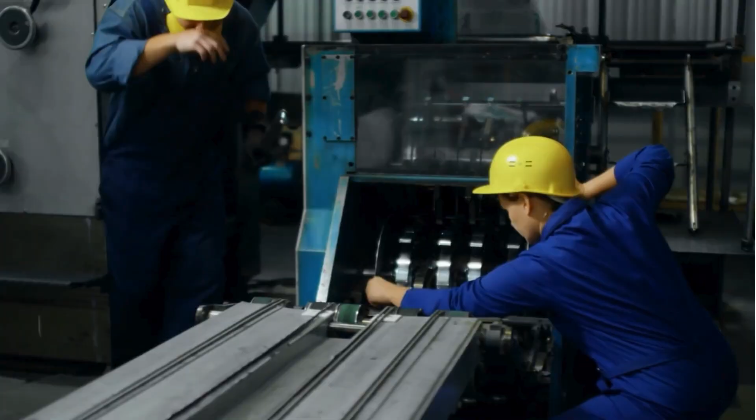Equifactor is the equipment troubleshooting methodology within Taproot to help us understand why a piece of equipment failed. A lot of times an incident, an accident, or some event adverse to quality has some equipment failure involved in the mix, and Equifactor is our tool to help us really understand what happened with that equipment failure. It's not anything crazy engineering technical, you don't have to know any formulas. This is your framework to ask, just like in the rest of Taproot, the same questions an expert in that technical area would ask, so you can get the same answers even if you're not an expert.

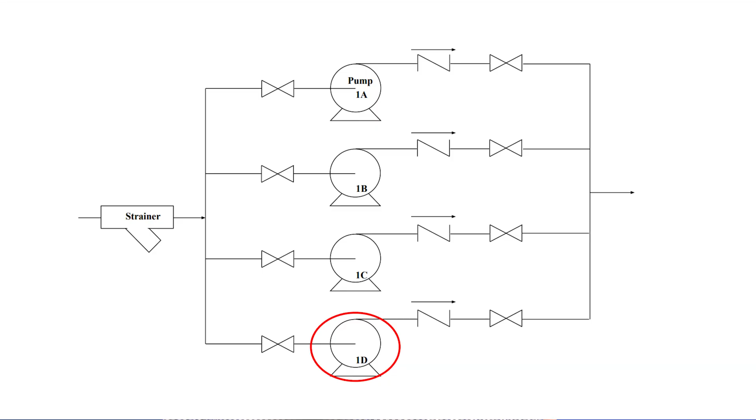We'll walk through a couple examples and see how easy it is to use. So our first one is a pump failure. We have 4 pumps running in parallel. They all went through an overhaul and were put back in the system. They all passed their operational tests except for one pump. This pump is giving us a lot less flow than it should, and we need to figure out what's going on here. So this pump 1D is giving us problems. The rest of them are running awesome.

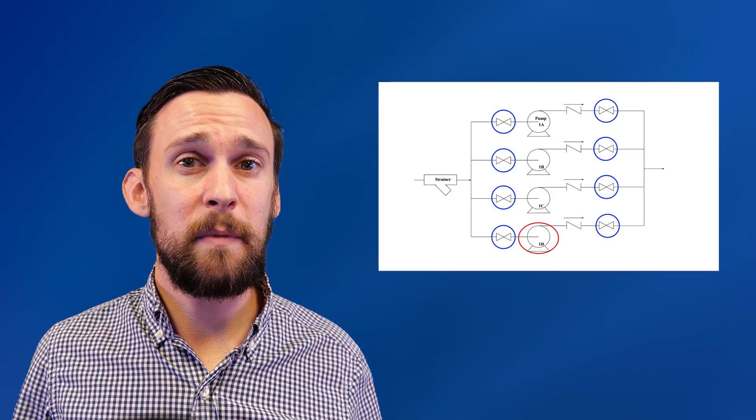All of these pumps are pulling water from the same place and pushing it to the same place. They each have their inlet and outlet isolations in case we do need to work on them, and that check valve there is just to make sure water goes one way. This may not seem like a very complicated diagram, but it's enough to help us ask all those same questions that the experts would.

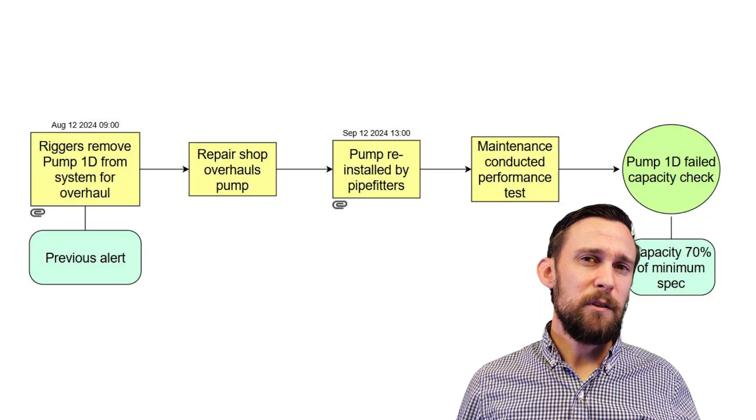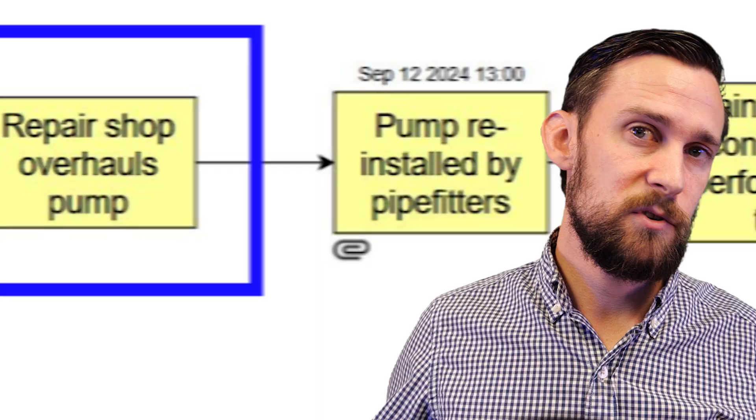We're trying to understand what happened here, and in Taproot that always happens in our SnapCharT, and so that's where Equifactor lives. Now at the start we need to have just a quick timeline of events, and for each of these pumps they were taken out of the system to do their periodic overhaul that they're required to do. The repair shop overhauled the pumps, the pipe fitters reinstalled the pumps, and when maintenance conducted the performance test, 1A, 1B, 1C all worked great, but 1D had only 70% of the required flow. So we need to figure out just what's going on here.

What do we need to look for before we go take this pump back out of the system? There's a few places we can go to learn these questions. This is going to be in your SnapCharT in the Equifactor piece on the Techniques tab. You can pull up your cell phone and go to the Taproot mobile app, or if you have the Equifactor book, all of these tables are in that book as well.

Since I am not a pump expert, I'm going to sit down with one of my expert operators from my company. They may not be a pump expert, but they're very familiar with this equipment. So we're just going to step through the questions to narrow down what we're looking for. First, we know this is a pump issue. I asked my operator, hey, what type of pump is this? What are we working with? Oh, it's a centrifugal pump. And that's the table we're going to walk into.

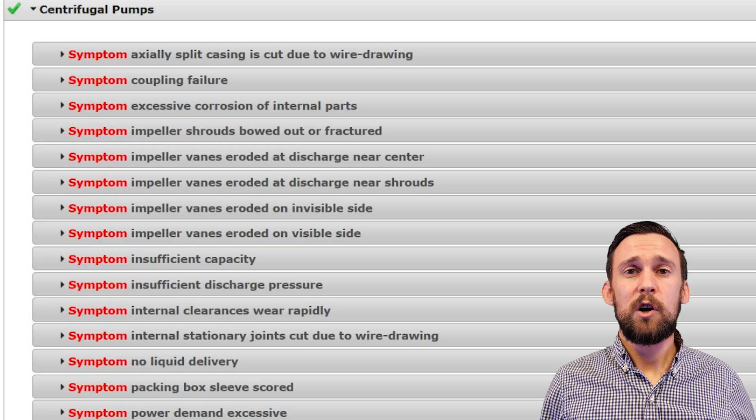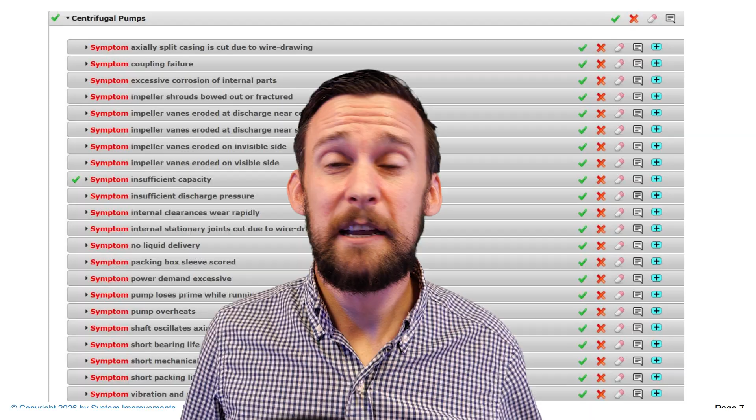Now when I open up this list, there are quite a few symptoms. There's a lot of things that can go wrong with a centrifugal pump, and the one we're looking at here is insufficient capacity, the pump isn't pumping enough water. Now if I see multiple symptoms, like the pump is also overheating or I'm burning out bearings really quickly, then I will also look at those for the same failure. Here we just have a simple loss of flow, and that's all we're looking at. So with my operator, the next step is to open up that symptom and look through all of the possible causes to figure out what do I need to look for here for this pump failure.

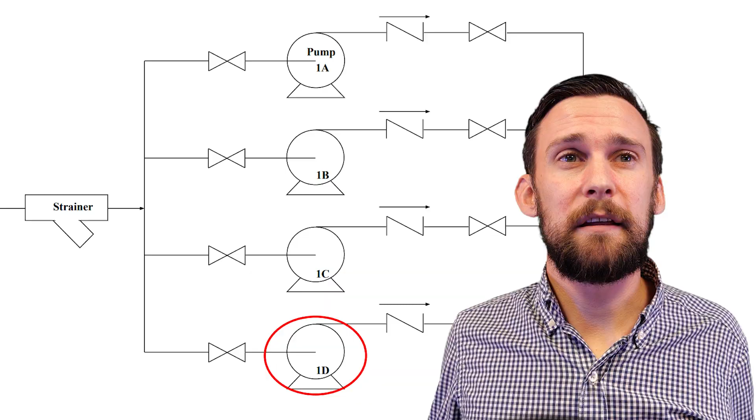You step through one by one asking, is this a possible cause? Our first one is the clogged suction filter or strainer. Is it possible that in this situation we have a clogged suction strainer leading to loss of 30% flow on this one pump? If that strainer is clogged, all of the pumps would be having issues, so we know that is not a possible cause. We mark it off and move on. We never need to look for this because it doesn't apply to our situation. Now we go to the next one.

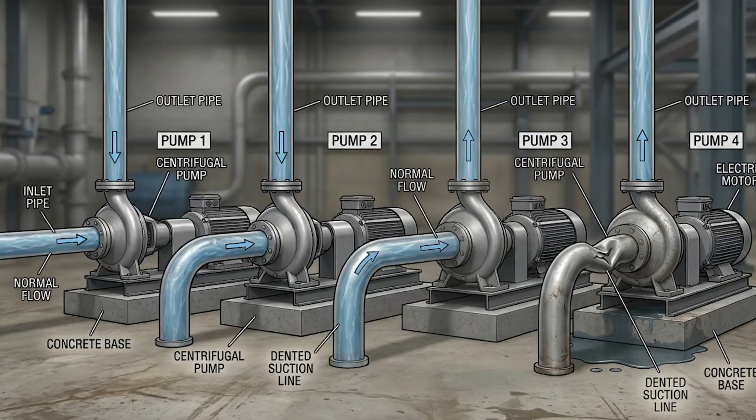Is it possible we have a damaged suction line? Well, we would either see a huge puddle on the floor that's growing at that rate, or we have a huge dent in the suction line. My operator is going to tell me really quickly we don't have this huge kink in this big suction line, so we can cross that off as well.

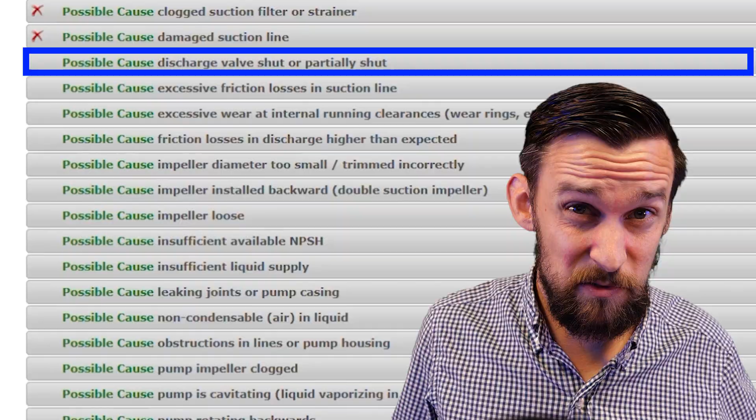Now in the same diagram, is it possible that there is a discharge valve that's partially shut? Maybe it just wasn't opened all the way and we need to go check that. So we're going to add that to our troubleshooting plan. Now most operators are going to have already checked this, but just in case we're in a really stressful situation, we want to make sure that we check it for sure. It'd be really embarrassing if we took this pump out and we weren't able to gather that data, if we just missed something simple like that. So we want to make sure to check it.

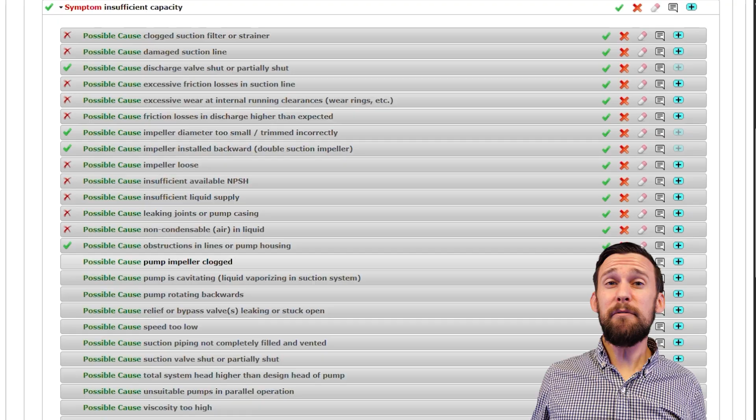Now you're going to do the same thing with all of those possible causes, and in a few minutes you're going to narrow down everything for every insufficient capacity down to what applies here, what we need to check here. And you can see all those shapes got added to our SnapCharT, and this is our troubleshooting list.

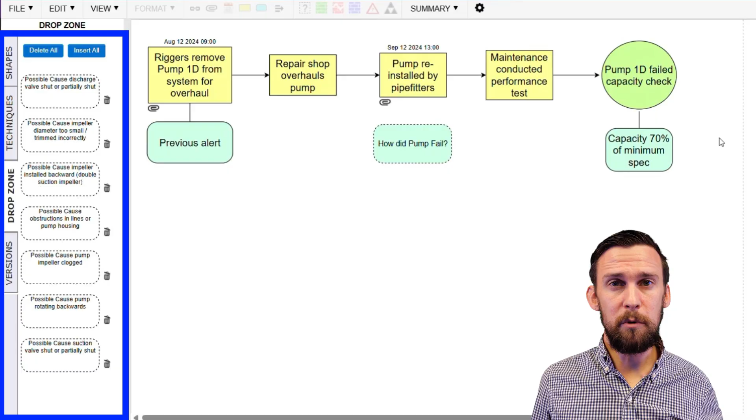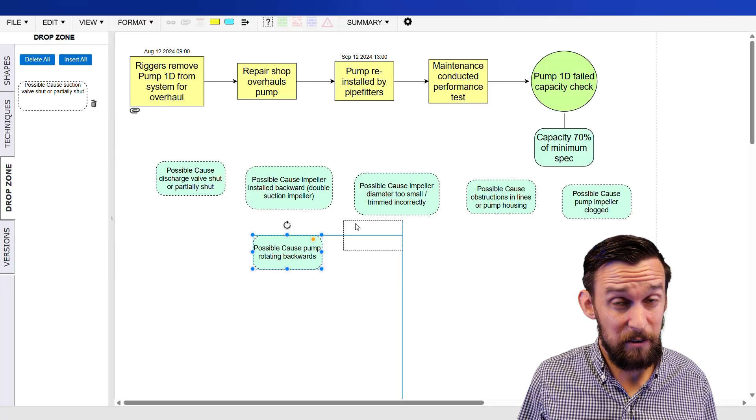Easy as that. So now we need to build out our basic plan on which ones we need to gather first. And we see all these ones on the left. There's some that we have to check first before we go on to the next step, otherwise that data is going to be lost. So we want to make sure that we put the valve line up first. We want to check the rotation direction. And then I need to give my operators a specific step-by-step work instruction.

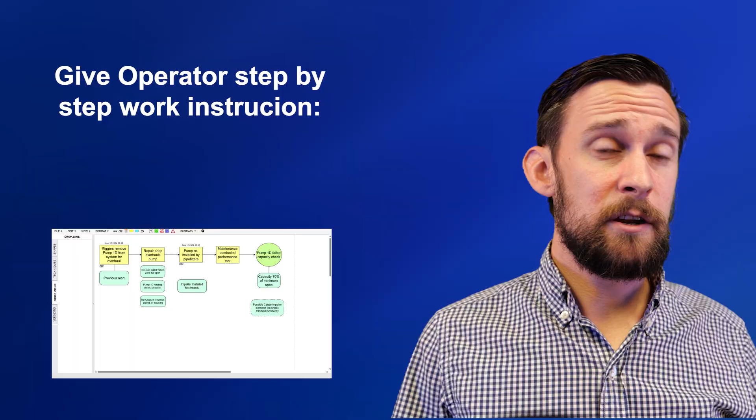Here is when we need to check for them. Here's when we do them first. And then when they go to troubleshoot the pump, they'll step through one by one until they find one issue or the multiple issues that may be happening to prove exactly how this pump lost its flow. And now we have proven what happened. We now know exactly how this one pump lost its flow, and there's nothing else. We did our due diligence, we dug as deeply as we need to, but we found the issue here.

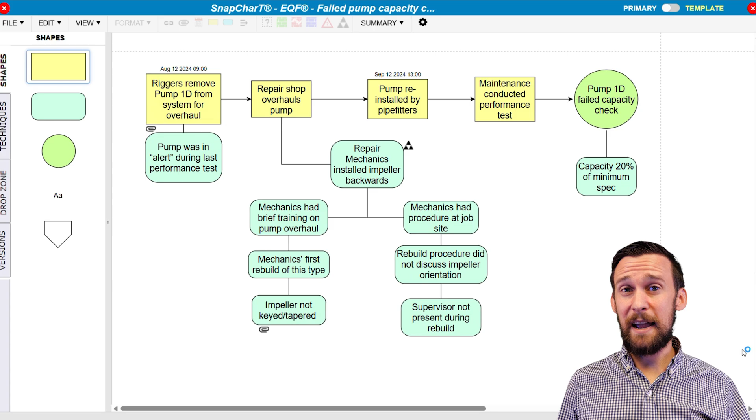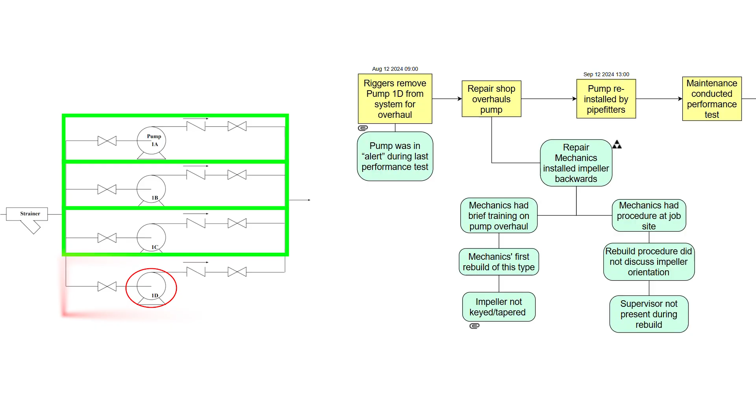So we add that to the SnapCharT, and while most of the other root cause analysis systems would just stop there, flip the impeller back around to the right direction, and probably discipline the overhaul mechanic and have them retrain everybody because they made the mistake, we want to figure out what led to that mistake. And so the rest of Taproot will help us do that. But just for the piece of Equifactor, it helped us figure out what led to this equipment failure, or what the equipment failure was. So that's really great, Justin.

And if I have those equipment tables already built, I'm good to go. I can solve all of those, but you don't have my piece of equipment. What do I do? Well, there's lots of good ways to go about that, but the first one you should look at doing is just to build a custom table for your process equipment. If it is highly customized, you probably have experts that know a lot about it, and they can build their own tables so your organization can build that knowledge and learning and expertise for your equipment that nobody else has.

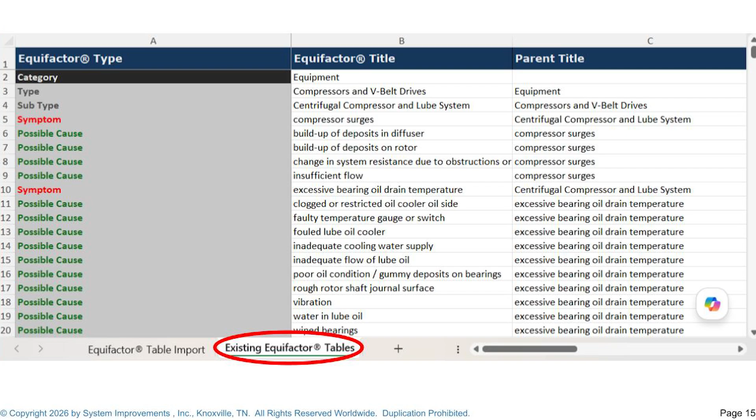There's an article that will walk you through how to use that information in your organization—it's a really simple process. In those same Equifactor tables, you can download the template to build your own. You'll get an Excel spreadsheet with all the standard tables in an existing tab that shows you how to build them and the format. It's nothing super complicated, usually pretty easy.

We love this equipment and want to take care of it properly, making sure we don't miss anything. But what are the assets we care most about in life? It's not equipment in a power plant—it's our families. So one of the tables I really like to build is for troubleshooting: why is my child crying? I'm not an expert in children crying, but maybe my wife is, and she can build me tables to help figure out why this poor child is crying.

In just a few steps, using the expert information you have, you can build this out. So if mom needs to go to the store and dad is the operator while she's gone, I have a quick checklist to run through so I don't miss anything basic and cause all kinds of problems. I can restore normal operations and happy people as quickly as possible with all the expert guidance.

If we need to get really specific with troubleshooting, mom's going to tell me exactly what a wet diaper looks like, how to check for a soiled diaper. This is a pretty cheesy example, but this is how our very technical and global organizations use Equifactor for exactly the same things—how have we seen this piece of equipment fail before, and what do we need to do to troubleshoot it? This tool gives operators the guidance they need to answer those questions so we don't miss anything we've seen at other sites.

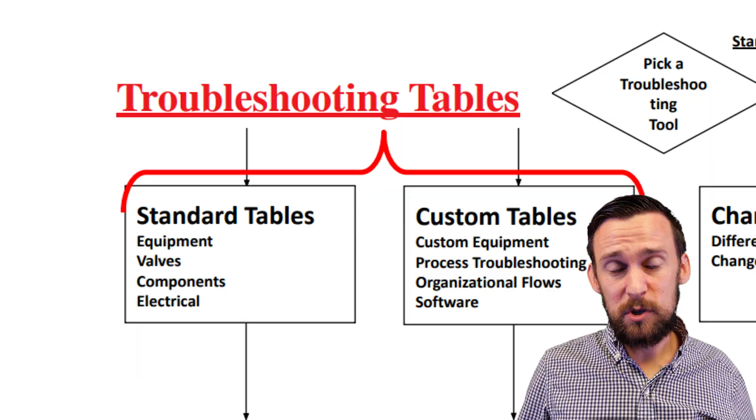Standard tables and custom tables—two pieces, the most commonly used pieces of Equifactor—but there's a lot more here to do simple and complex troubleshooting. All of this, at the end of the day, helps us understand what happened with our equipment failures. Then, for every piece after that, we go through the root cause analysis process with the rest of the Taproot system.